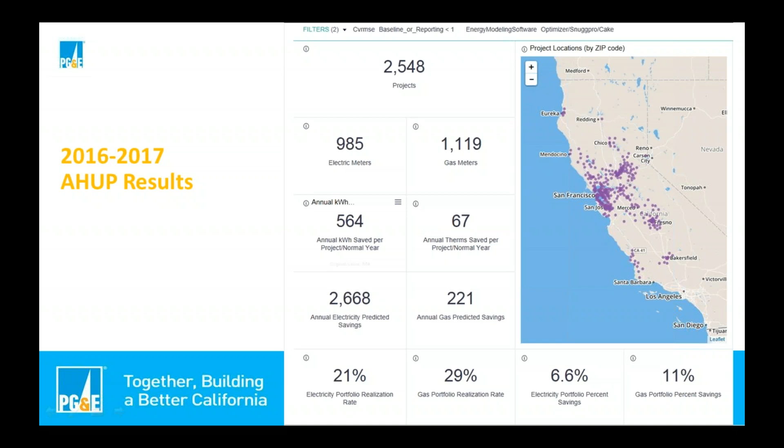So obviously there's a couple of things we have to do. We have to improve the use of the models so that they're not over-predicting. We'd also like to increase the savings in the program. And if we do both of those things well, we can bring these numbers much closer together. Any questions on this quickly before I jump off this slide?

Okay, fairly self-explanatory. So let's move from that to this. Why does this matter? And why is PG&E under so much pressure to balance out this equation, to get high energy savings?

Well, we're held to something in California called cost effectiveness. And there's two tests for cost effectiveness. One is called the TRC, that's a Total Resource Cost test, and the other one is the PAC, or Program Administrator Cost Test. I'm going to talk mostly about the TRC because it's really the one that is primarily used to judge the utility programs. And if we have a TRC greater than 1, then it's safe to say that we can probably keep that program going for a while.

If it's less than 1, everyone's taking a very close look at that program to see if it can be replaced with something else. And the TRC is really just very simply a benefit over cost calculation. So if you can increase the benefits up in the numerator there, you're better off than decreasing your costs down in the denominator.

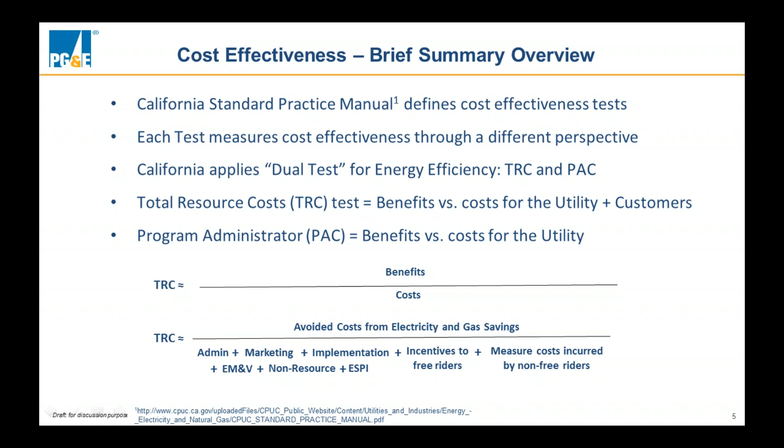And I want to focus on the top part of the equation here and talk about benefits for a moment. So we mentioned the avoided cost for gas. And what's been happening over the last 13, 14 years is that natural gas prices have fallen pretty considerably, and that's because of fracking.

Natural gas has gotten much cheaper to extract from the ground, so we're paying a lot less for it. So when we save natural gas, we're not getting the benefits we used to get, making it more challenging for us to get a TRC above 1.

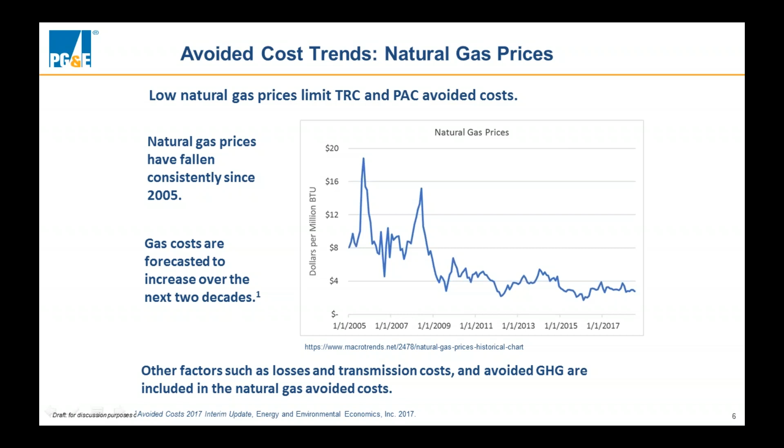Let's look at the electric side of the equation. These are the components of electric avoided cost. There's a whole bunch of things that factor into the cost of electricity at any given hour of the day, across the year.

During the summer months, there's obviously a huge peak load. As temperatures get hotter and air conditioners kick on, everybody comes home from work, turns on their lights, starts the dishwasher, and turns up their AC.

On those really, really hot days of the year, PG&E pays a premium for electricity. We can foresee some of that, and we have to bid against other utilities in the Western grid for some of those resources and have them held and set aside for us, so we pay a premium for that.

If there's a day we didn't predict and the temperature goes way up, we have to pay day-ahead, sometimes hour-ahead market prices, and it's extremely expensive. When you look at costs across the year, they're pretty low during the middle of the day when solar is on, and then at the end of the day, as solar goes offline and we start purchasing power from other sources, it gets very, very expensive.

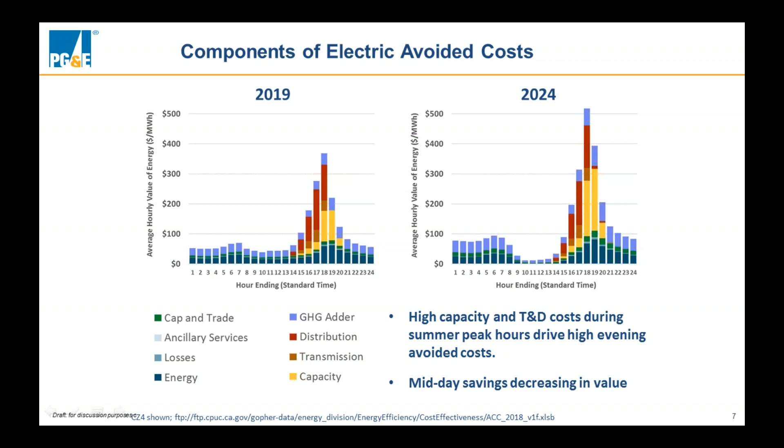So how have we been doing? On the left is the peak demand curve, showing 4 months from 2015. You can see where demand goes high in the afternoon hours.

On the right-hand side are the results from our program, the Advanced Home Upgrade Program. That's not a demand curve, that's a savings curve, showing when you guys are actually getting savings during the day, broken out into the 12 months of the year. You can see that for the shoulder season months there's not a lot of savings, and not a lot for the winter months since we're looking at electricity here. But for some of the summer months, we're getting very good savings during that same afternoon window.

And we can do better than this. We can even improve these load saving curves, and we will. That's what we want to talk about today—some ideas for how we might go about that, and how we can work together to make that happen.

Any questions on that? We have one: the savings shown on the earlier slide—are those home or gross savings, or net?

Yeah, so the slides we've been showing are gross savings. You may have heard these terms, gross savings and net savings. Basically, these savings from our program haven't been compared to what they call market effects, or what's going on out there among all energy users in PG&E's territory. It could be that all energy use is going down a little bit, and that's in fact been the case.

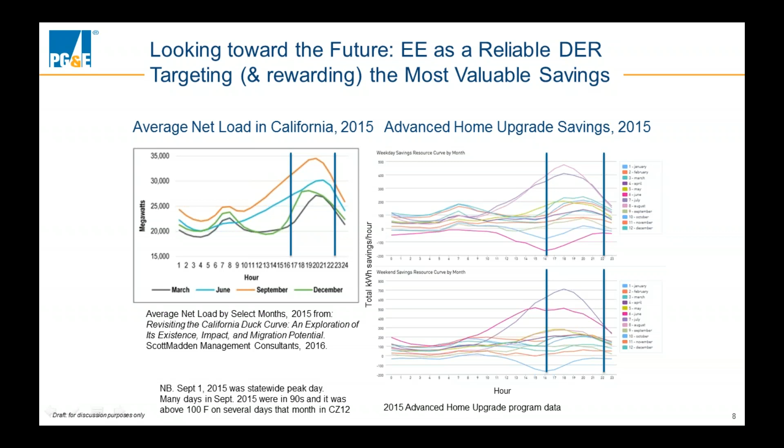Okay, so first of all, the first thing we need to do is reduce the overall customer incentive by 50%, to align more closely with the actual energy savings, those average realization rates. And we plan to do that by January 1st, 2019.

Technically I should be cutting these by 70+%, but I don't want to do that much—but I need to do something radical. I need to be responsive. The CPUC wouldn't consider us to be responsible program administrators if we didn't react in some way to this. So that's what we're proposing, number one.

Number two, we want to increase the software realization rates to 80% electric and 80% gas from the current realization rates of 21% and 29%. And we want to do that by roughly a year from now. We need your help to do that.

Third, we want to increase the average per-home energy savings to 1,200 kWh and 120 therms from what it is currently, 564 and 67. Again, we want to try to do that by November 1st of next year. So we have pretty aggressive goals.

And then finally, very important to us is ensuring the future PG&E program participation for high-performing contractors. So all of you who want to go there with us and grab that ring, become high-performing contractors. Some of you may be there or nearly there right now. But for all of you who want to be there with us, we want to ensure that there's future work through PG&E energy efficiency programs for all of you.

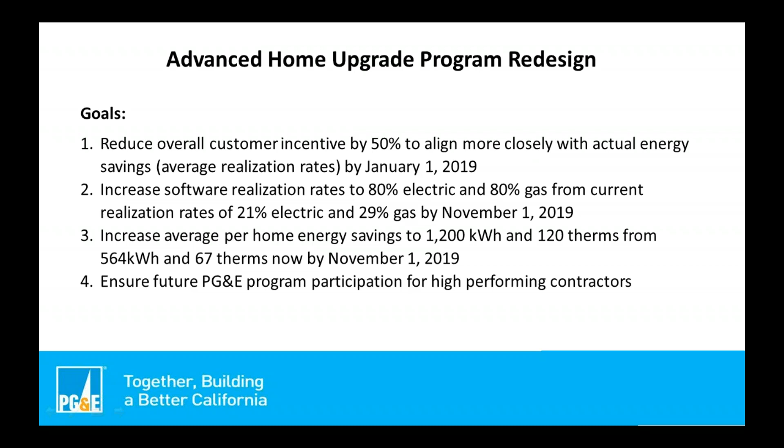All right, so the first goal, to elaborate on it a little bit: reducing the overall customer incentive by 50% to align more closely with actual savings. We achieve this by taking the existing advanced home upgrade structure and simply applying a 0.5 modifier to all the savings that we capture. So there's the tier-based site savings.

Is there a laser pointer on this? Oh, okay. There's a tier-based site savings, and then there's the kilowatt hours and therms. So out of the energy modeling, we get those two outputs, right? The tier-based site savings applies to the overall—it's basically the kilowatt hours and therms converted to BTUs, and it's the whole savings for the site. And then we take and add incentives to the kilowatt hours and therms specifically, separately, and that gives you a total savings for the project.

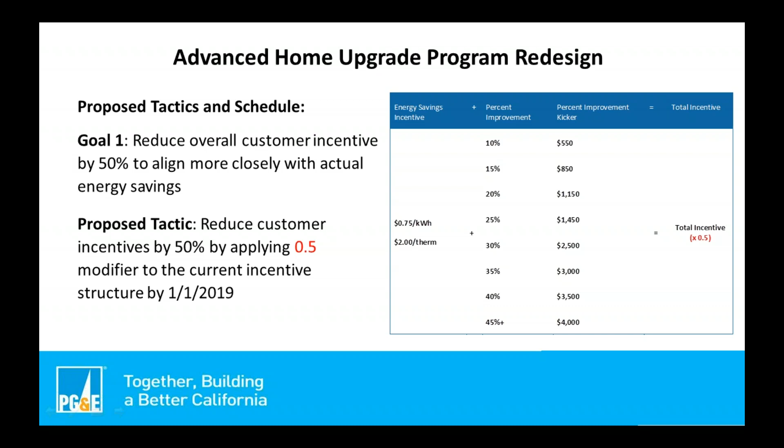So if most of you are familiar with this, all we're proposing is to cut that in half using the 0.5 modifier. It should be pretty simple to see and understand, and it's not so much about communicating it to customers, because what you communicate is a total incentive, which will already have been modified at that point. We're going to do this, targeting the beginning of the year.

Oh yeah, it might. So what happens, it's effective January 1st? Yes. What happens if you've got a job that already has a notice to proceed in December, and it goes in? I'll get to that in a minute, but basically you want to clear through that stuff by the end of November, beginning of December, so you don't have anything still in the approval process by the time we turn the clock over to January 1st.

The software modeling tools stay the same, so just a quick image here - there's the laser pointer - Optimizer and Snuggpro on the right.

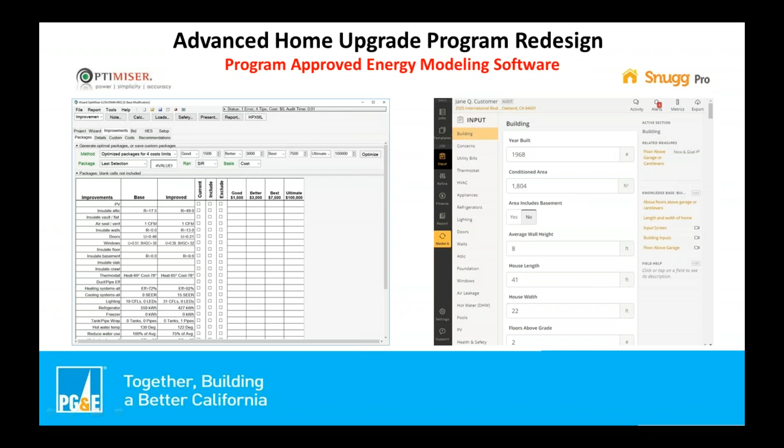Goal number 2 is to increase software realization rates to 80% for electric and for gas from the current 21% and 29% respectively by November 1st of 2019. So we're looking at a whole year to get to this point, but in order to do this, we've identified some tactics to try and get there.

What we want to see is that all the energy models submitted be calibrated. This is a feature that hasn't been utilized fully in the past - some contractors do this already, but very few have taken advantage of it. It's something we see as a tool to get us closer to actual savings versus predicted savings. There are also some assumptions baked into the software modeling tools, and there are different ways to be out of alignment between prediction and actual savings.

One of the primary ways is to make better assumptions about consumption based on a previous year's worth of customer data. So what we need is, when you go out to a project site, to sign up the customer to use PG&E's Share My Data feature, which allows them to share their utility bill data with us. Then we calibrate the models for you guys. What you get back after you submit it is a calibrated model, with maybe some adjustments needed, as some of you are familiar with in the QA desktop review process. What we get is a closer approximation of predicted savings relative to actual savings - that's the goal over time. We're looking to be doing that by November 1st of this year, so all energy models become calibrated by that time.

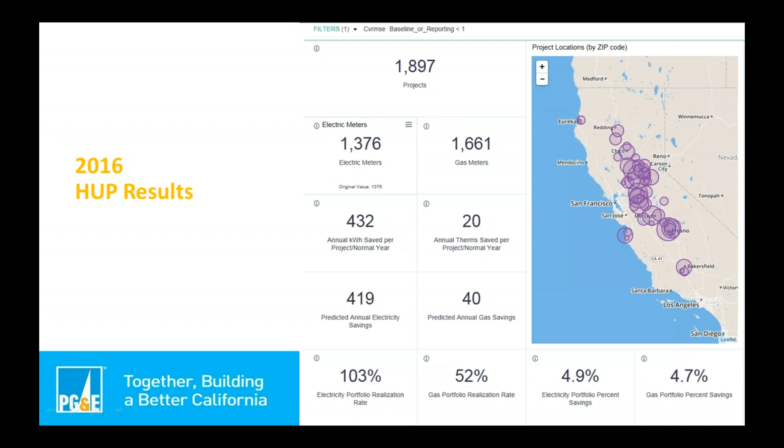These are the results. So this is why we're proposing to not apply a modifier to the electrical side of the savings out of that home upgrade calculator tool, and on the gas side it's right around 50%, so they align pretty closely.

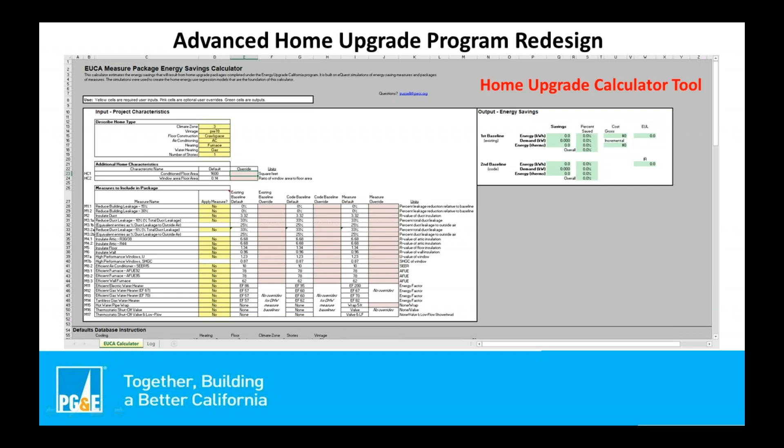It's very similar to the energy modeling software Q&A you may already be familiar with. It spits out kWh and therm savings as well as site savings for the whole project, so it's a very similar end result in terms of the data we can base our incentives on.

Just before Torsten moves on, I want to make clear, if you use that tool, you don't have to get permission from the customer to access their data. That's one step in the process you can avoid. If you continue using the approved software right now, you have to get the customer to provide their login information for their PG&E account, and then they can give permission to share the data with Build It Green. It's an extra step in the process for you.

So the customer doesn't have to share their data? Yes, we have something called guest access now. We made it a lot easier than it used to be. All they need is their account number and the phone number associated with their account, and then they can give permission to Build It Green to get the data. But it's still an extra step - they have to get their account number, remember the right phone number. Maybe not that hard, but something to consider.

Ideally you'd be working with a tablet on site, so you can sign them in using that URL right there and run them through the process on the spot. We'll have documentation that gives you a step-by-step how-to on running through the process, but it's pretty simple. You can go there and do it online, yes.

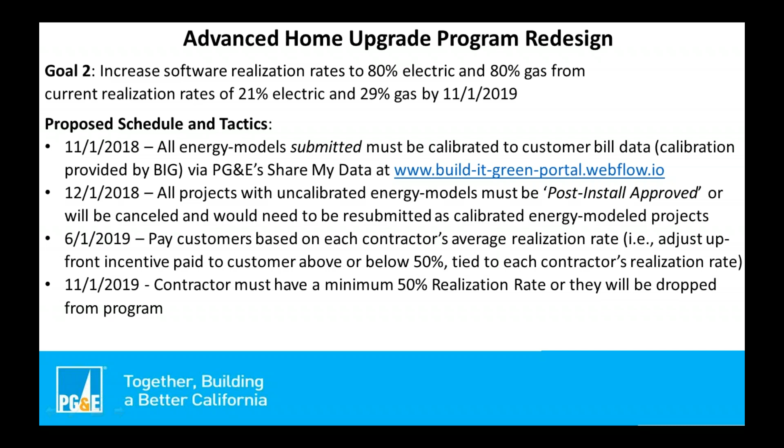For this guest login access, it's supposed to be up and running and working pretty well - you need the account number and their phone number. If you don't have internet service, we do have a paper form too. We'll work on the documentation to make sure it specifically highlights the details you need to follow, because with accounts you can have multiple service addresses, whereas service IDs serve a specific address. So someone could have a bill with an account covering multiple services for different buildings - it has to be specific.

And then as far as goal number 3 goes, we also want to, as you saw on the summary slide earlier on, increase the overall per home energy savings to 1,200 kilowatt hours and 120 therms, up from 564 and 67 respectively, by this November 1st look back date, so the analysis period of approximately a little over a year.

One of the tactics, or the primary tactic to get to that point that we've identified as helping us get there most effectively, is to provide training and a contractor incentive of $1,200 per project to meet the high performance HVAC installation standards.

So what we know is that a lot of the systems that get installed tend to be not performing as well as they could be. And there are a number of reasons for that, a lot of which we'll go through in a little bit more detail here.

But ideally, you've taken advantage of that incentive and on every project, you're doing more basically residential commissioning on your systems. So there's more measurement involved and there's adjustment as you go, and it's a bit of a change in the mindset and approach of your sales folks and your installers. But it yields some really good results, and it's kind of a market transformation that we'd like to see occur, and we think will get us to this higher per home energy savings.

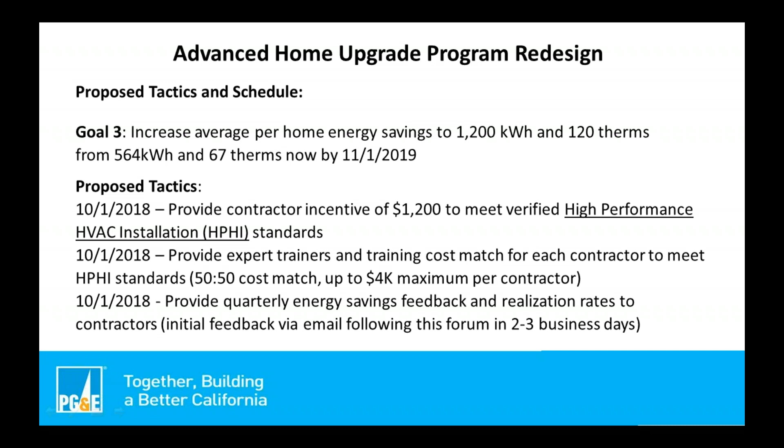We will have some initial feedback for contractors following the forum. Give us a couple of days to do that. So early next week, look for an email on that. That allows you not only to see your realization rate, but also gives you a link to follow up with and provide feedback on, ask questions about it.

Yes. Can you repeat the question for those on the webinar? And can you speak more into the mic? Oh, yeah, so let me move a little closer. The question was specific to a customer who wanted to potentially do a different configuration on their system. So that question I don't think we need to get into here, it's more of an offline thing, but I'll try to repeat them into the microphone here.

So the standards themselves, I'm not going to go through these in deep detail because Dan will be doing a little bit more detail on them shortly.

In effect, for item number 1 you have equipment efficiency requirement to meet, and for item 2 it's more about downsizing the equipment you could install on any given project, and getting for item 3 the airflow up and the watts per CFM down, so making sure you're maximizing the efficiency of the system.

For item 4, getting to at least 3% total duct leakage, but ideally effectively 0% duct leakage. There are ways to do that, not the least of which is making the duct run short, fully extended, and run low, which also allows you to bury them in insulation.

For item 5, that's kind of the roll-up for performance on the AC projects. It's getting to 85% or better of manufacturer performance tables on the delivered sensible EER. There's a spreadsheet contractors will be able to use to take in all those measurements, and it delivers a value for that particular metric.

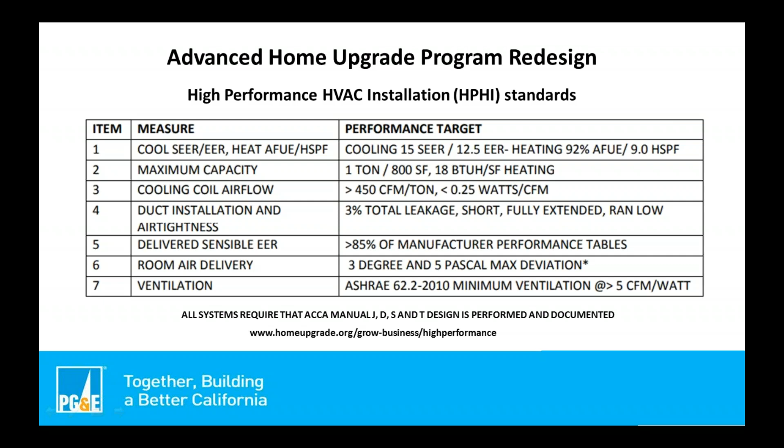And then also ventilation, meeting ASHRAE 62.2 2010 California, and making sure that when you do those fans or centralized system, it's not consuming more electricity than it needs to deliver ventilation.

You all should have picked up a copy of those standards and the data collection sheets when you came in. As far as collecting the incentive goes, training and mentoring is required so that you understand the expectations in greater detail for measurement and for data collection, meeting all 7 of those performance specifications on the previous page. That documentation is available at homeupgrade.org currently.

Performing this measure should be included as a line item on a scope of work, ideally with a specific measure cost set aside for it, although we don't want to get too much in front of your process. So as long as it's called out on the scope of work, that's sufficient. If it's part of a larger package cost, fine, but it'd be great to be able to see that as a line item, including the associated specific costs.

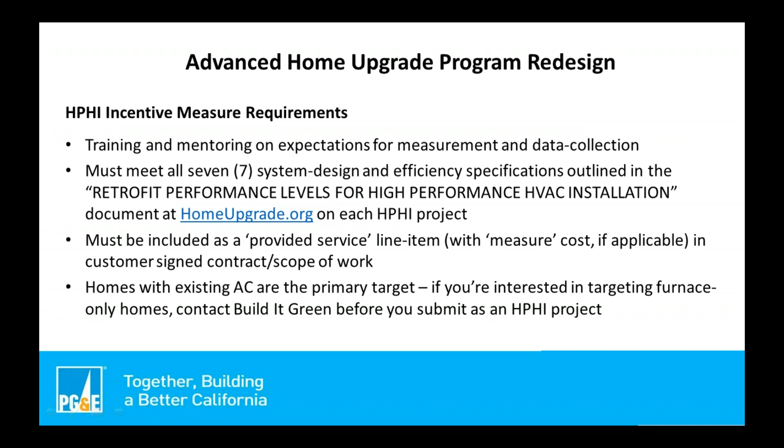That's good data. Homes with an existing AC are the primary target of this, although you can do homes that are heating only, but do contact Build It Green before you submit, so we're clear on all the expectations and which of those metrics you're going to focus on for that kind of project, because obviously the delivered sensible EER is not a metric you can use on those projects.

So to collect that incentive measurement, there are requirements that include for the measure itself. You actually want to have an existing advanced home upgrade project. This will be something you can select within the contractor portal as an additional measure. Once you select that measure, if you are an approved contractor, then you would add additional documentation that includes the spreadsheet with all the measurement on it, any additional pictures, etc.

The 7 specifications are something that will be QA'd along with that advanced home upgrade project by Build It Green's QA review team at 100% rate, the current rate that we do for all the QA on each project. And then 100% FQC by Build It Green on the first 3 high-performance HVAC install projects, to make sure everyone has got it nailed when they're out there in the field and doesn't need additional mentoring to brush up on anything specific. Once you've achieved that, release it back to a 5% FQC rate, provided that all 7 specifications are being routinely met on each project.

Question: Don't you think that incentive's a little low for what really is happening in that requirement? Even if you incentivize guys to go for it, wouldn't it be better? I think the incentive isn't designed—so the question was, isn't it a little low for trying to achieve that kind of work?

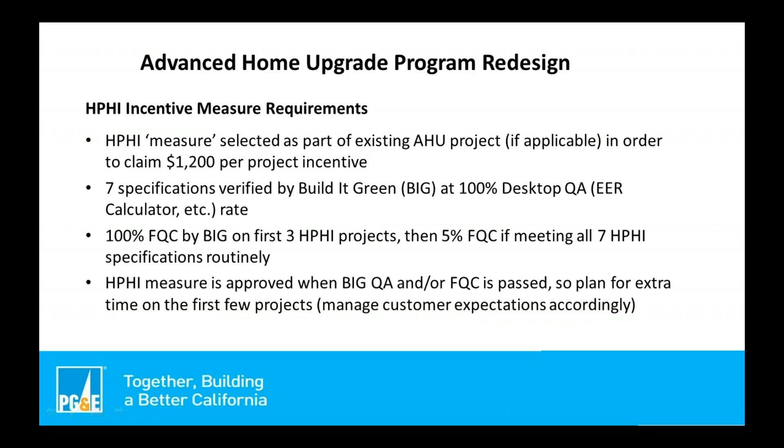As far as the high performance HVAC install measure, it's approved when Build It Green QA and FQC is passed. So on these first 3 projects, plan for a little extra time, and manage customer expectations accordingly.

So as far as the high performance HVAC install training goes, it is a significant time commitment. You're talking about, for the sales staff, a couple days of extra time, administrative staff potentially in the office, especially if they handle a lot of documentation and submitting documentation to Build It Green. And then the installation staff and the crew leads, more like 5 days at least. So it is something to think internally on, and you've got to be committed to it. You want to take the plunge, but we want to go there with you and help you do better work out there and collect an additional incentive in the process.

The training must be completed prior to the rebate application submission. That is because this is more involved than a typical install process. It is residential commissioning. It requires a lot of extra measurement and follow through and adjustment as you go, and it's well worth the experience.

I've been out to a few of these, and we've had some contractors go through this already, and they've actually changed some minds. They approach projects differently now because they've been through the process. And while not every customer is going to be a good candidate for this, they do approach every project, when they go in the door, from the idea that they want to offer this and try to do this every time they go out, and they'll do as much of it as they can. So they're out there doing better work regardless of whether they're meeting all 7 of those specifications.

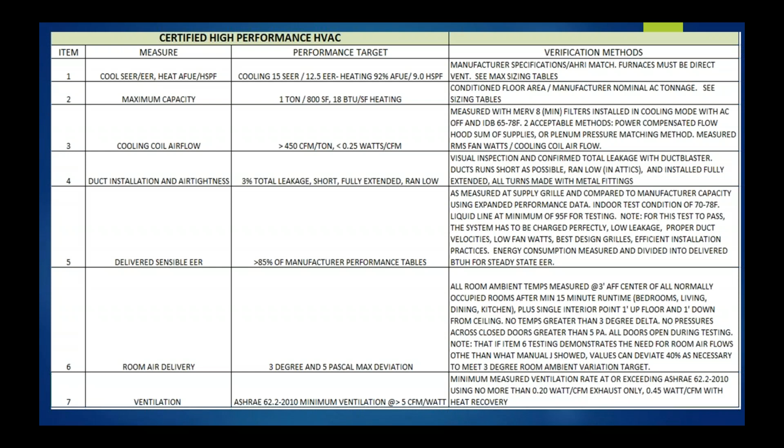There's a document that describes this—let me jump back a bunch of slides so I can point. Okay, so on the right-hand side where it says verification methods, those methods all have to be done following a procedure and with proper equipment.

And that corresponds to this document. It's a multi-page document—it says what the procedures are, it says which pieces of equipment we can use. I suspect we're going to do an update to this soon because one of the pieces of equipment has changed. I know that, and possibly the program people didn't, because I'm not a full-time staff person.

So I'm telling you, we probably have to make a change. There's a newer flow capture device on the market that should qualify for this. There's a device called the Flow Blaster that the Energy Conservatory made, which is great, but they screwed up—the batteries are bad, and so they stopped making it. That was the best piece of equipment when this was written.

So I think we'll broaden the acceptable pieces of equipment for this. But the big flow hood that the HERS raters all use, it won't qualify—it's not accurate enough. And that kind of stuff will be in this document.

So why do I get to be up here? Because we're still back in this place, right? The boulder keeps rolling back down the hill. The HVAC industry is not turning out a product that's getting us what we want. And you guys represent people who are trying and have had successes to varying degrees, right? And so that's good, but overall we still have this problem.

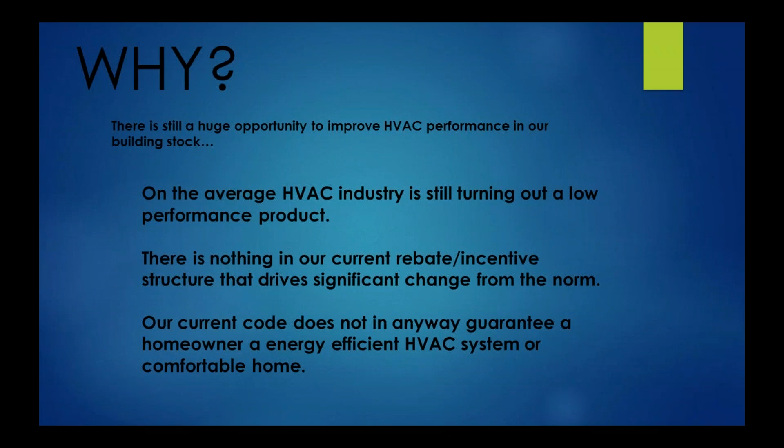Does that feel fair? Anybody feel picked on? Like you guys are kind of like ringers, right? If I had a bigger audience, I'm sure somebody would be annoyed at me at this point. Which is kind of the point.

Because I get to teach these classes, I get to meet all kinds of people. There was this guy in class who said the sizing criteria you keep talking about don't seem right - he'd never heard anything like that before. I said, no, a bunch of us are doing it, it works, we can prove it, I'm 100% certain this is true. Then I said, why don't you go back and look at the data? Because the CEC's got all this data from permits and HERS ratings. Go see what's going on, tell me if what's coming into the office is any good, because they sort of all believe they're busy making code and making rules, and it's pretty good.

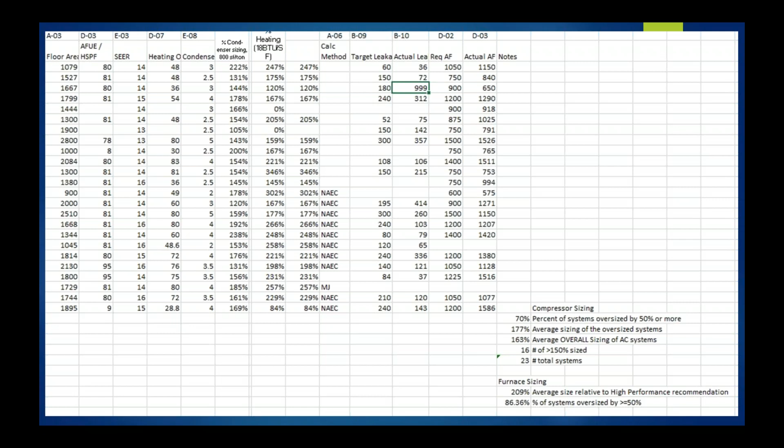So this guy actually did it, and he sent me this data set. It's not very big, but it's super fun and kind of depressing. 70% of the systems in his data set were 50% or more oversized. The average sizing of the oversized systems was 177% of our target. If you pull the AC systems out by themselves, they're 163% oversized. Of the total sample of 23 systems, 16 of the 23 were at least 150% oversized.

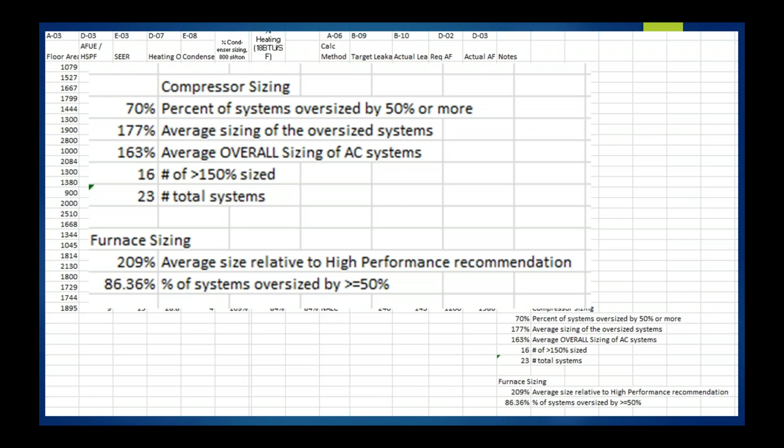So what are we happy about? Why are we proud of ourselves? Maybe you're not doing this and you get to be proud of yourself, but as an industry - yay for us, right? This sucks. At least they got permits, and these are permitted systems. That's part of the argument I've been having with folks at the CEC: the permitting in and of itself is largely meaningless at this point. We're not making the changes we need to make by virtue of requiring permits.

So, soapbox aside, what do we have to do? This is the same stuff we've been talking about for years now. You adopted it a long time ago. You guys have adopted it, which is great. We just need to continue moving in this direction.

Forced air heating and cooling systems can be thought about by 6 basic principles, and you'll see these line up with the program requirements - they were thought of by the same guy. Years and years ago, I asked Rick Chitwood how to figure out how to talk about and evaluate HVAC systems, and he said there's this article I wrote called Performance Factors for HVAC. Here, read it. It listed 6 things, a design target, and a way to test it. I thought, this is great - it's a super simple, extremely effective way to look at what we do.

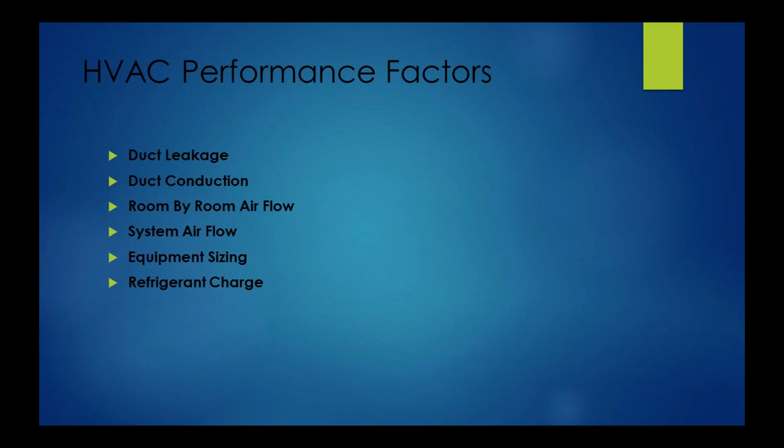So, duct leakage: 3% of nominal flow, right? That's a 50% improvement over code. In this program, you'll actually have to have airflow, whereas in code you can kind of not have the nominal airflow and still get credit somehow.

Is this a hard target, 3%? No, this is way too easy. Contractors that are doing nothing else right are already doing 3% or better. Contractors who just aren't paying attention at all are struggling with this, and it showed up in that data set - a bunch of things didn't qualify, but this is easy. Use mastic, right? Done. Use a lot of mastic, even better. This is not hard. I know a story about mastic.

Okay, I've been coached that I let people talk too much and I'll blow my time slot, so I have to do it fast. In 2013, we did a house in Oakland, built in 1996. Bueller Heating Air had done the system, right on time. I was up there doing the duct leakage test and looking at the furnace. He had a name on it, and it was one of the only ones I'd seen at the time using mastic - everybody else had been using duct tape. We went down to do the duct leakage test and got 2.9%. That was 16 years after the fact, and he still had 2.9%. At the time, Title 24 was 6% on new construction, so I was targeting 6% duct leakage.

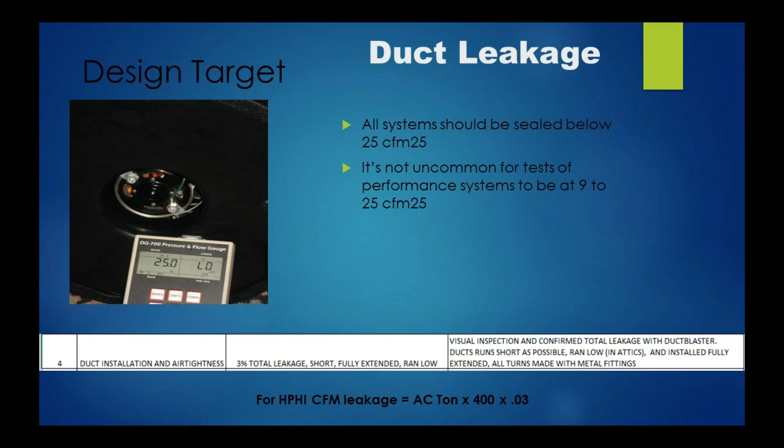My company uses 25. It goes right in our work scopes: duct leakage will not be higher than 25 CFM. All systems should pass code at that number, and it gives me a hard target that is never flexible. If I do a 5-ton system, which I've never done but theoretically could, I would still do 25 CFM of leakage. If I do a 1-ton system, I could too. So a hard target is the way to do this.

Okay, so that next piece about ducts run as short as possible and low in attics is just about thermal losses. Thermal losses are huge in our climate because we do about the dumbest thing you could possibly do: we put HVAC systems on roofs and in attics. And I'm not saying we're dumb, it's just kind of hard not to at this point because that's how all these buildings were built. We have millions of these.

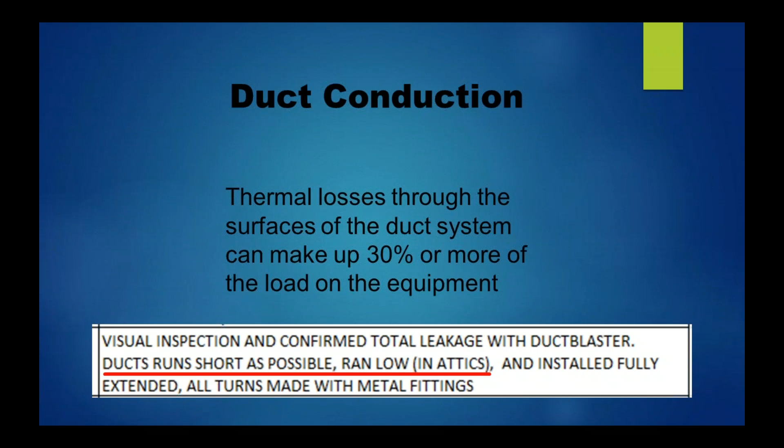So it's our job to improve them to the ultimate level we can get away with, because this is the worst way you could do this. You can't find more harsh conditions to put a duct system in than the attic of the building. So we have to be really careful about how we do it.

So this is a mathematical calculation assuming a 2,000 square foot house, assuming 40% surface area of the duct system, which is the average relationship between ducts and floor area. If you do the calculation for attic temperatures and R6 ducts, we're looking at 0.89 tons of loss capacity. In this climate, you would do R8 ducts by code now. There's still, I think, maybe some coastal climates where you can get away with R6.

Never use R6, it's crazy. Find a way to get the customer to pay for R8 and then bury that, because a third of the capacity of a 3-ton system can be lost just to hot ducts. Why would you give that away? Or, if you thought about it like this: if you fix this piece, you can reduce the size of the equipment by 30%, which makes it easier to comply with the program, and it's better for your homeowner. They get better air quality, and they get lower bills and increased comfort.

Why'd I say better air quality? Ducts are sealed, but it's directly related to equipment size.

Runtime, runtime. California has some of the worst air quality in the nation for particulate matter - farming and traffic and fires and everything else. How do you get particulate out of the air? With a filter. You can run the system so it filters the air all the time, and then have a massive air conditioner kick on and off once in a while to offset the load you're creating by doing that. Or you can run a tiny little conditioning system with a big filter at high airflow and get free filtration. It's up to you.

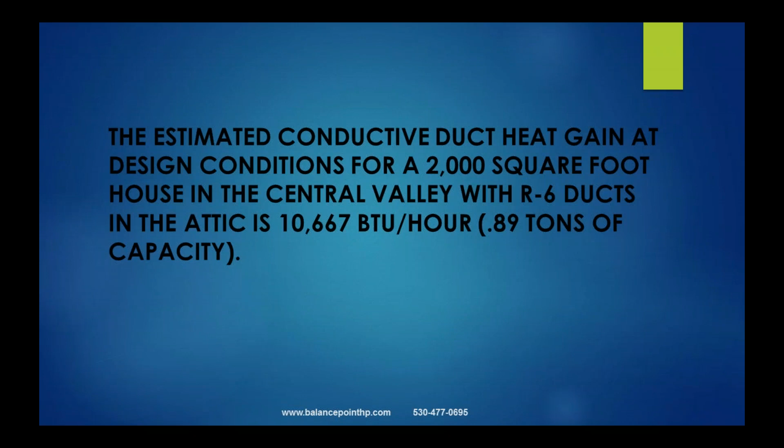We should be selling air quality. And if you sell air quality right now, people will buy it. Has anybody gone outside this summer or last summer? It's not a hard sell. Small equipment will do a better job for you.

I didn't do that, I don't think. Hold on, there we go.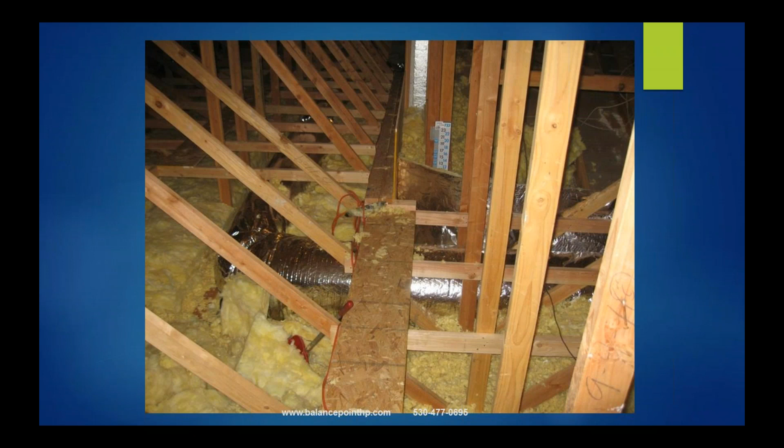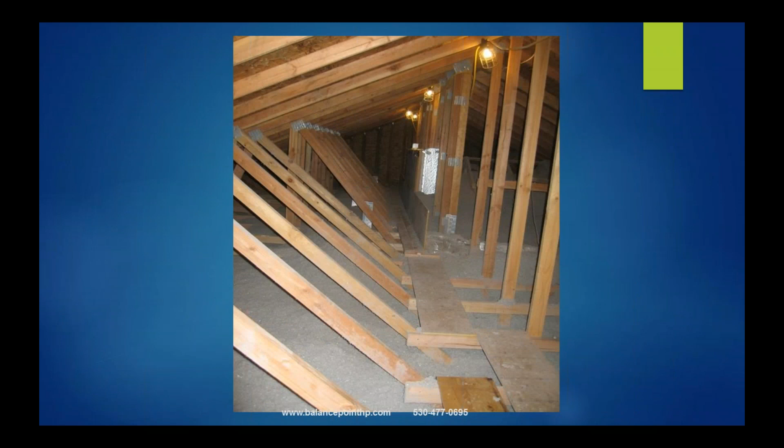Okay, so run low in the attic and short as possible. In this instance, sadly, that was short as possible - there's a layout that I couldn't change, and so this big elbow in this duct was unavoidable. We frequently reposition stuff, like abandon one ceiling supply and use a different location to shorten ducts. And this is the same photo. Run low, pull tight, bury it.

Crawl space systems. You know there's a furnace in this photo. Did you know that some furnaces can be wrapped in insulation? If you think about it, if you're going to take the hottest thing in the system and put it outside the building enclosure where we'll have the greatest losses, wouldn't it make sense to insulate it?

So what's the deciding factor whether or not you can wrap a furnace in insulation? In theory, you could just wrap a furnace and be in trouble. How do you know? Has anybody ever seen the thing on the label that says clearance to combustibles? If it's 0-inch clearance to combustibles on all 4 sides, you could wrap it in something flammable, in theory. Fiberglass and foil-faced paper should be fine. And so we frequently do this.

Service access is interesting. I have an uncle who's an HVAC tech on the East Coast, and I was showing him pictures of our work. He was like, I wouldn't do that, I wouldn't do that. It was all about how, he's 70 now and worked into his 60s, and somewhere along the line he wasn't bending over for anybody. So the access became where a 60-year-old guy with a sore back could go without a lot of trouble, which makes some sense, but it's not a great way for us to design houses.

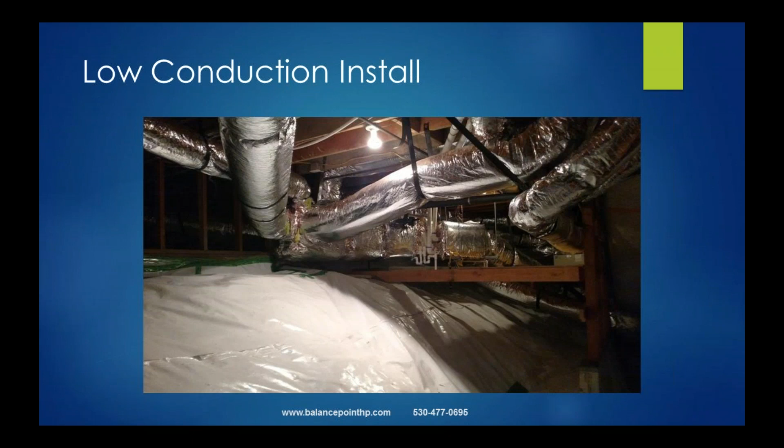This system in the picture actually has an unsealed insulated flap that can just be lifted over to the top of the furnace. The door is taped closed though, so that part kind of sucks. You got to cut the tape to get the door off.

We need a zipper. I've done attic access. Someone said there's actually a zipper solution that works on attic, a zip lock. Oh, zip wall, using a zip wall for attic hatch.

I had a question in the back. Yeah, where was the filter located in that system? In this system, the filter is located at the return grill, which is my preference for filtration because it's easy for homeowners to take on the service themselves.

So let me add an addendum to my service tirade. If the homeowner is not going to change the filter or is not able to change the filter, then they need service. That does need to be done. If you use 4-inch pleated filters, it might be once a year instead of every 3 months.

Don't you want those filters as close to the furnace or the air handler as possible? Because if you have a long return duct with potential leaks—no, I don't. This is a super simple process in my head: I don't have leaks because I don't allow them to happen, and frequently buried. I have to go do a service call soon because somebody's dog peed in their duct. Occurrences like a rat or a cat or a dog change this model—that's a service call, but it's not normal. The normal practice is if it's not leaking, it continues to not leak.

And so well built, well sealed, and you don't have the problem. In that instance, I want the filter at the beginning so that the whole duct is protected, and it's more accessible to the homeowner to change, which makes it easier on the equipment. It's changed frequently.

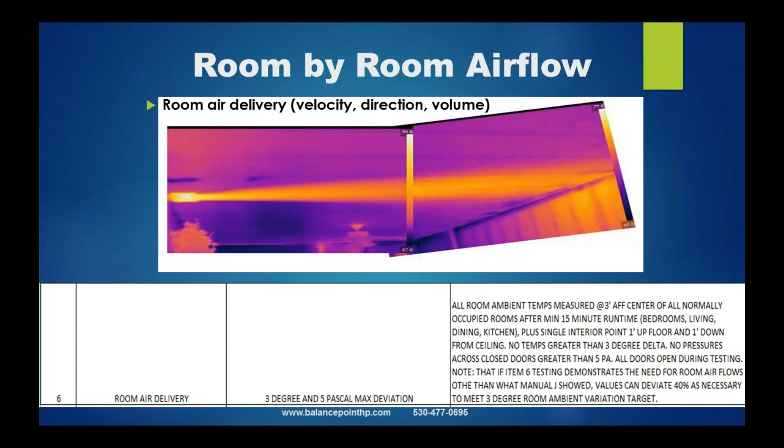You're not required to do this. Life is so much easier when you do radial design because you put a grill in every location closest to the air handler that needs one. So little tiny rooms, we skip them because they don't need to be conditioned. And then you put a damper in each of those ducts, and you can be in control of the airflow without it being a really horrible task. If you have to balance the airflow by climbing all the way across the building and all the way back to try to adjust dampers, it's difficult. If you skip the dampers, you're just guessing.

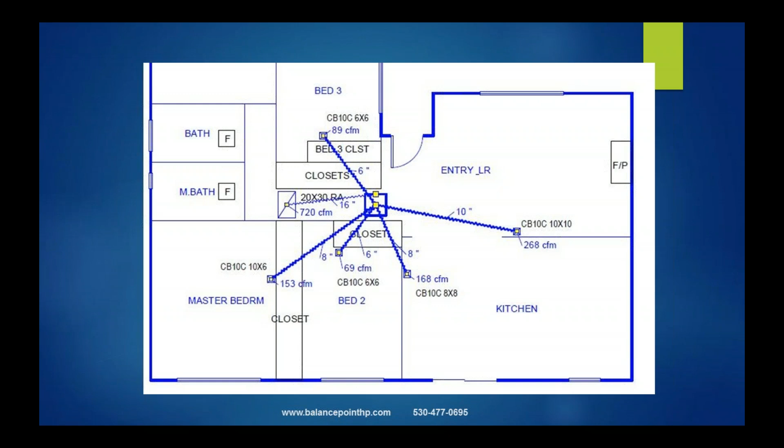So this is an engineering chart. I don't know exactly how manual J does the manual T process, but this is the gist of it. What this is showing you is grill sizes on the left, velocities on the top, and then in the rows and columns is a case for each grill. So if you pick like an 8x8 grill and 500 feet per minute, it would tell you how many CFM you need to make that happen, and then it would also tell you how far into the room the air is projecting as the air slows down.

And so the trick is to get your design airflow through a grill at 500 to 700 feet per minute and have that air hit 25 feet per minute before it hits a person and get 80% of the way across the room. It sounds complicated, and it is a little, I suppose, but you can get used to this. I've been doing this for years, and I've had a couple of times when I had to go back and change airflow because I was blowing on someone, but mostly this works without a lot of trouble. And it's very effective in terms of mixing the home and controlling temperature.

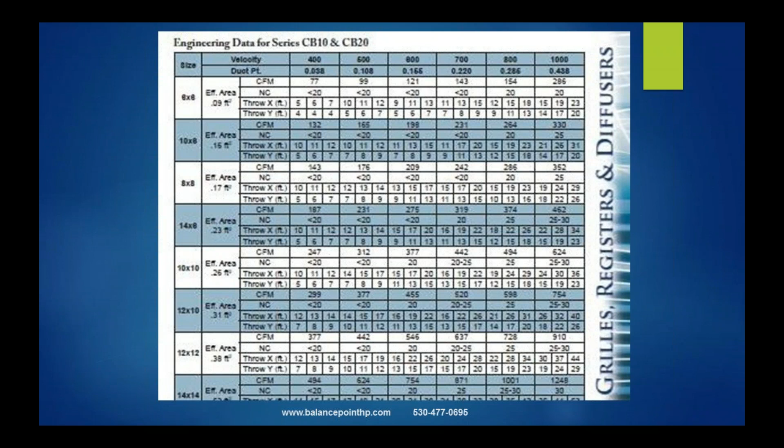So just so we're clear, you can't use that flow hood. I just didn't have a better picture. I should probably. But we're going to measure supply air with a flow hood. And for our delivered capacity calculations, you're allowed to use the sum total of the supply measurements if you use an accurate flow hood, described in the measurement document. This flow hood isn't accurate enough for the total delivered capacity calculation.

It works okay for balancing. I used it for years and then found a better tool and stopped. But the process is the same. In this picture, we're going around to each grill, measuring the airflow and adjusting it to match our targets.

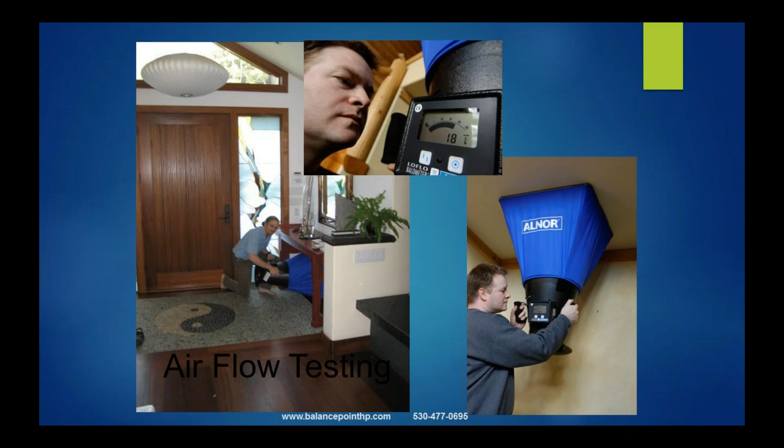Is he barefoot? Gavin is barefoot in that picture. Someone asked if the gentleman on the left is barefoot, and he frequently is. I may or may not have photos of him barefoot on a roof. It's good that we're a little company and OSHA doesn't visit us frequently.

Okay, cooling coil airflow. So 450 CFM per ton is our target for this program. Why? Does anybody not know why yet? Does anybody know why? Why do we do high airflow? The boulder just rolled all the way down the hill.

Yeah, so we live in what is effectively a desert, right? When's the last time it was 80 degrees and 80% humidity here, for more than about 90 seconds? Right? There are weird humidity events, especially on the coast. But generally speaking, if it's hot out here, it's like 15% humidity, maybe 20. If it's cold out, it gets more humid, and it even rains.

Turns out that the actual weight of water per pound of dry air in California is roughly the same in the summertime and in the wintertime. If you get it cold enough, the air gets dense enough, the water comes out of the air. If you warm it up, the container of air gets really large because it gets to be low density, and it feels really dry, right?

And so how much dehumidification does it sound like we need to do with an air conditioner? Literally none, right? We should not manage moisture with air conditioners. They use too much energy for that. You can do a continually operating bath fan with an ECM motor for 8 watts and manage moisture in a house, right, in this climate. If we were in Louisiana, we'd be having a different conversation, but we're not.

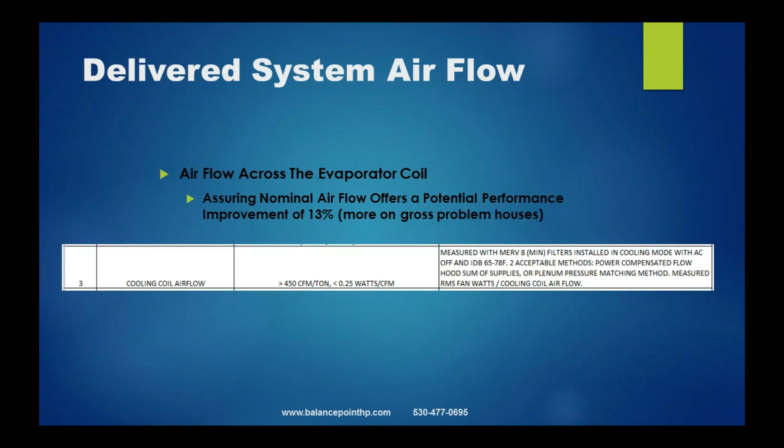But we need for this program to get to 450 CFM per ton and 0.25 watts per CFM, which is—my brain has trouble with the math that way—250 watts per 1,000 CFM, right? So pretty low fan energy consumption. And we get there by doing things like sizing our ducts properly and stretching them.

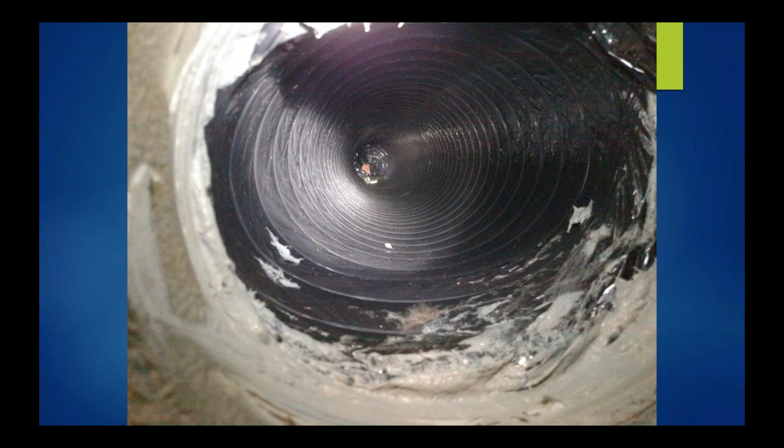Oh, yeah, and remember before when I said I didn't know why we have low airflow? Turns out that one of the things we found in a research study 3 or 4 years ago was that of the 80 new homes they went out and sampled, they pretty much all had undersized returns, every single one of them. And then they went out and just upsized the returns, corrected the airflow, and corrected the charge, and they got 10 to 15%, probably more like 10%, more delivered capacity at each of those case houses than they had gotten as built by code, just by correcting the return, which raised the airflow, and then correcting the charge to match. 10% boost.

We have a program here that's struggling to justify itself, and we're still building stuff where we get a gimme just by fixing the return, right? Like, we should stop.

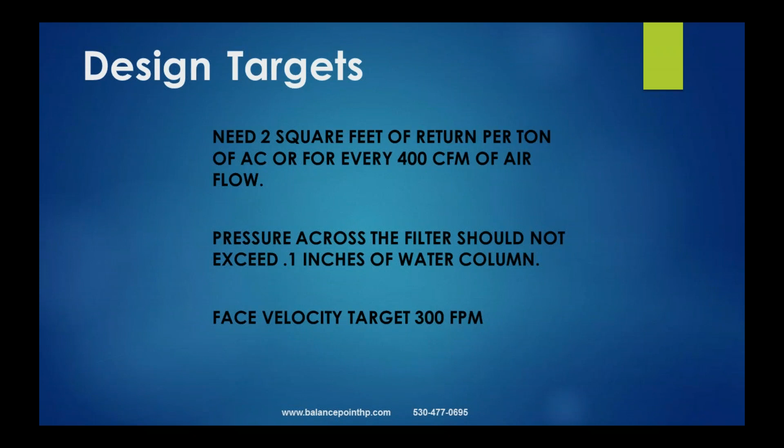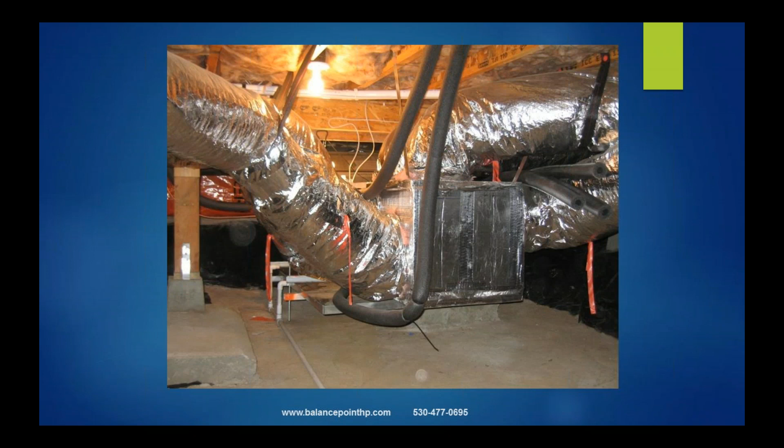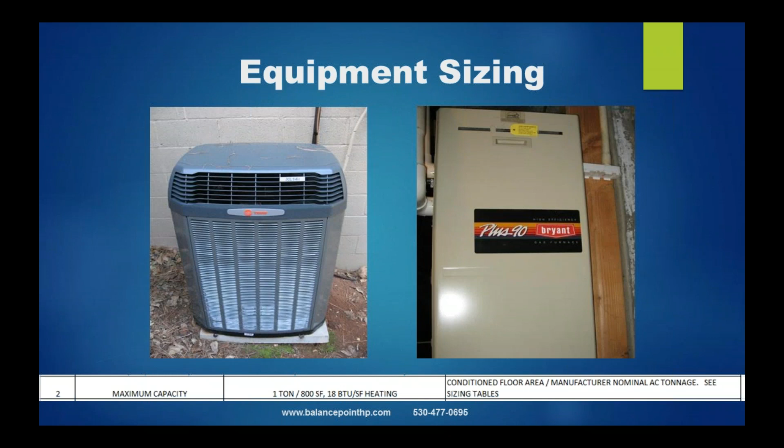And those are conservative, those aren't hard. We can do this on just typical buildings - they don't have to be incredible buildings to pull this off.

And then it's big - this is where it gets a little weird, right? I keep saying smaller, smaller, smaller, but it turns out big fans turning slowly are way more efficient than small fans turning quickly. So ideally, if you're not using a furnace, you'd use something like a 3-ton air handler with a 1.5 ton condensing unit, or a 2-ton condensing unit. The fan is designed to move a lot more air than the condensing unit requires, which means you can set it on a lower tap setting. The RPM of the fan slows down, and the efficiency of the fan blades is increased. You get more air moved per unit of energy with a big fan turning slowly.

And the AHRI matching process is so strict that you can't go crazy - you can't do a massive air handler with a tiny little air conditioner. We can usually do a 0.5 ton or 1 ton mismatch, and we should in our climate. So this is a 2-ton air handler, or a 2.5 ton air handler I think, and a 2-ton outside unit - so it's only maybe a 0.5 ton mismatch.

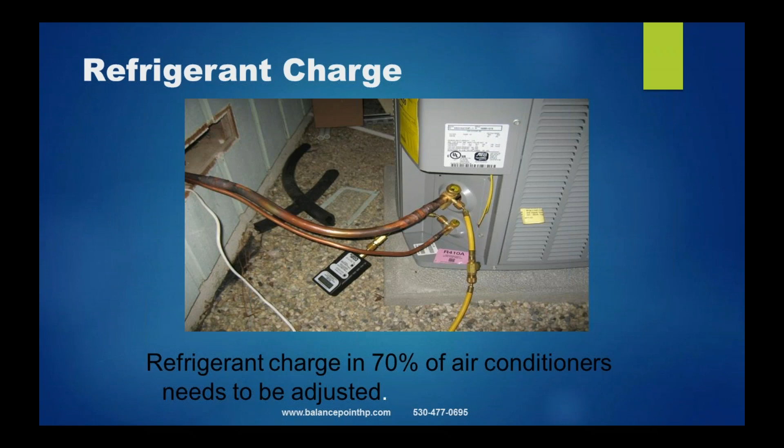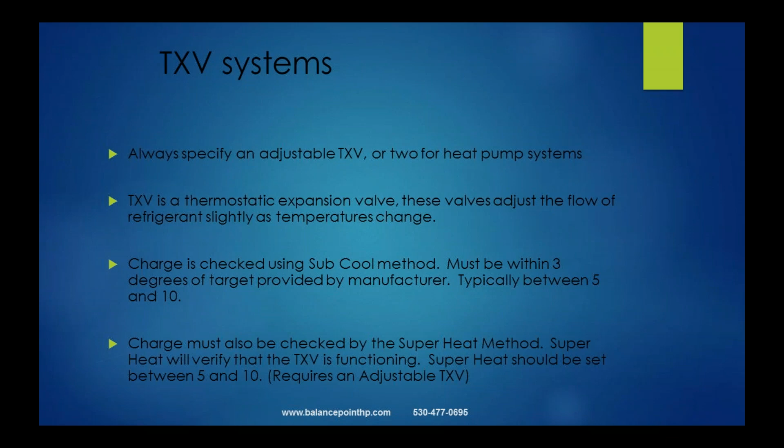I think I probably just said everything that's on this slide. Obviously we're doing higher efficiency equipment, so it's going to have a TXV. Subcool is required by code, and we want that to be as low as the manufacturer will allow. Subcool is basically a measure of back pressure against your compressor, so the higher it gets, the more pressure against the compressor and your watt draw goes up. So subcool on the low side of your targets, superheat on the low side of the manufacturer's target, and you get more capacity.

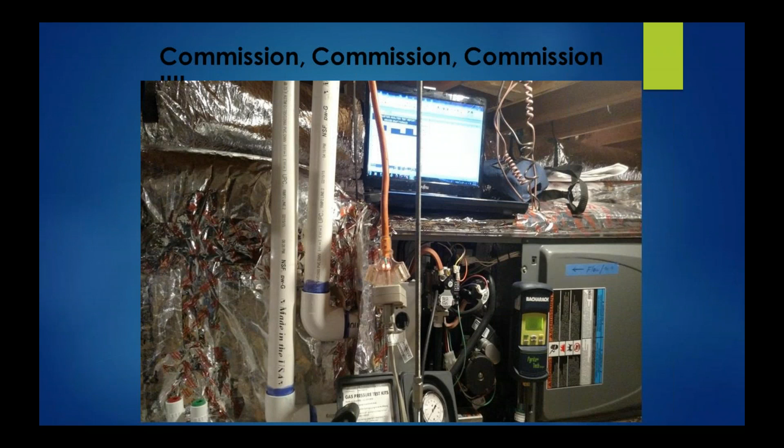And we should commission furnaces too. Does anybody actually measure O2, CO2, temperature, gas pressure, all of that stuff? National Comfort Institute is not a great organization for coaching on energy efficient buildings, but they are great when it comes to understanding the combustion process. They have a really good class about that - I think it's possibly the best class available for figuring out how to commission a furnace. So I would look at it.

So this is that last thing I said earlier in the review of code buildings. We were at something like 55% of delivery. If it's supposed to be 4 tons of capacity at design conditions, we're getting like 2.25 tons or something - a little more than half of the capacity to the house. The reasons are high duct conduction, high duct leakage, and low airflow. It's embedded in what we're trying to change, why this is happening. The people who are really good at this at design conditions have had systems over 90% delivered capacity, and we're not asking for that.

85% is what we're asking for. And I think with furnaces, it might have to be 85% of whatever the output is, because if you commission the furnace, there's not much you can do about the 4% that gets lost in the combustion process. So for furnaces we're going to have to figure something out. But for heat pumps and air conditioners, 85% delivered capacity is the target.

And if your equipment is big, is this harder or easier? You should be noticing a theme - it's harder. Why? Think about the temperature of the air in the duct. If you're using a large heater or a small heater, is the temperature of the air in the duct likely to be different? Small heaters should run not quite as hot as a big heater. If you do the math for figuring out temperature loss through a material, the variables are the insulation value or heat transfer value - U value or R value - the size of the surface, and the temperature across the surface.

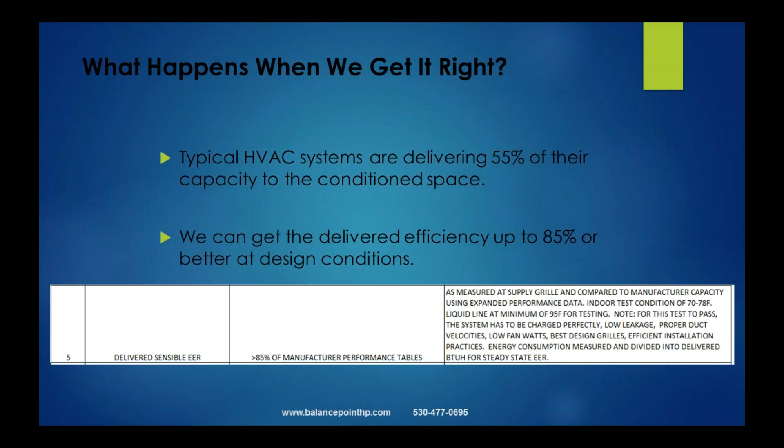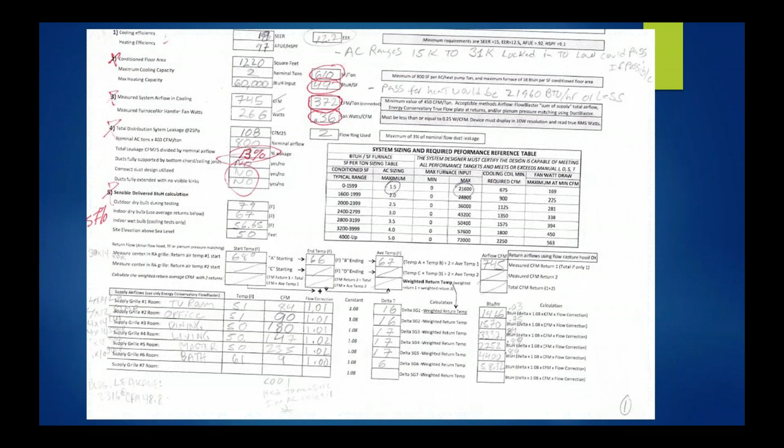None of these concepts are new concepts, right? The information about how to meet these criteria all exists already.

I think it requires some kind of change all the way through a company. The reason I say that is when I do these classes, I get, well, we can't do load calcs, it'll cost too much money. Okay, code says you have to do a load calc, by the way. So not doing one is actually breaking the code rules. I want to say breaking the law, but people get upset about that. So the rules say you have to do a load calc. They actually don't say you have to follow it. They clearly say you don't, but they do say you have to do it. So we're just saying do a useful load calc that's already required by the rules.

And the other one is, well, I'm never going to get my salesman to sell equipment this small. And then I always go back to, don't they work for you? I get that the employee-employer relationship is complicated, but at some point you could figure out these guys need to get paid, or girls, and they should be selling something that you want them to sell. There's got to be a way to get from here to there. And I'm not saying it's simple, easy, and that there's no stress involved.

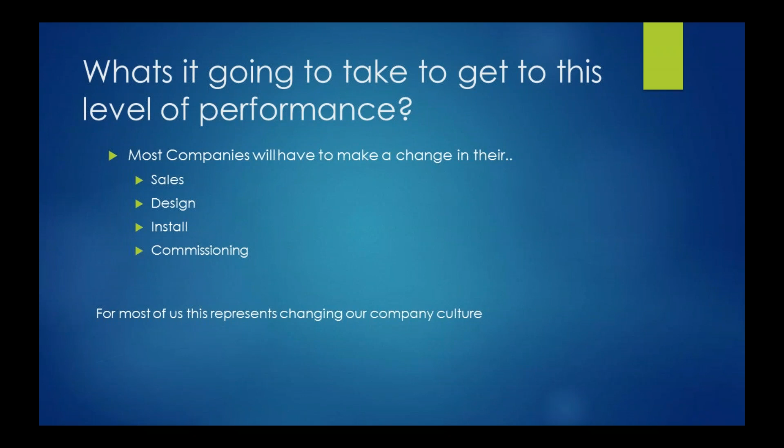But we can't just kind of hang up our hats. And then it changes design, and it changes install, and it changes our commissioning practices. We're talking about really changing the culture of a company. I've only ever done two rebate jobs in the history of my company, and I have no idea what my realization rate is. It might suck, I don't know.

I got one customer, $7,000. I got another one, $5,000. They were happy, I did the job that I thought was a good job. But I meet all these criteria on all of my jobs, which means that there are some jobs that I don't take, and I'm a small contractor, so I have the luxury of not taking some jobs.

And I realize that for some people, you're going to take jobs that you can't access all of these metrics for. But it becomes a question of, when is it okay to sell a job that has really bad airflow? Because the customer doesn't... at some point I'm willing to say no way sooner than a lot of companies will say no. And that's in part because of my company. I'm not trying to be judgy about that, but there should be some point where you say no.

So some of these metrics should just be normal, right? And that's kind of what some of you said in the beginning. We've adopted some of these practices and other ones we're working on.

So we have some money for training. You've got, like, if one of us came out to your site, you have the equivalent of about 5 days of time. And that's not a lot in a way, right?

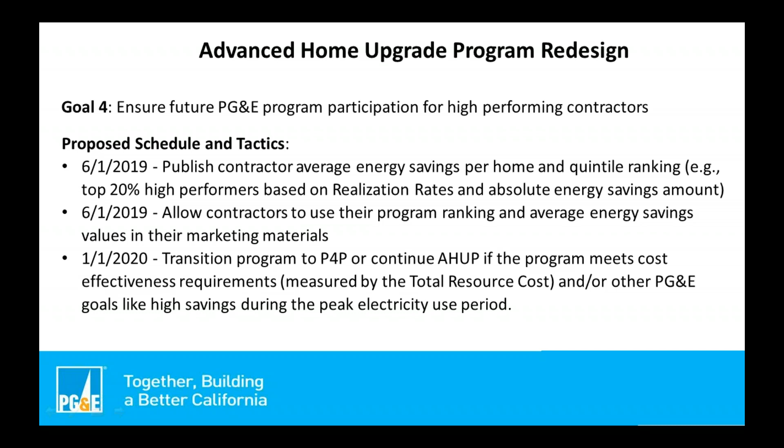So, to not leave that hanging, I wanted to touch on what pay for performance is in a couple of slides. As I mentioned, we put out an RFP, a request for proposals. We've done that twice in the last two years. What happens is an aggregator, also called an implementer, steps forward and says, yeah, we'd like to run this program for you.

And I asked for a bid price from all of them, very competitive. I considered a lot of factors in who we picked: who had a lot of experience out there with residential programs, who had a really good idea for how they were going to get customers and get savings, and also what the price was. Those were the main factors we considered. And then we picked four.

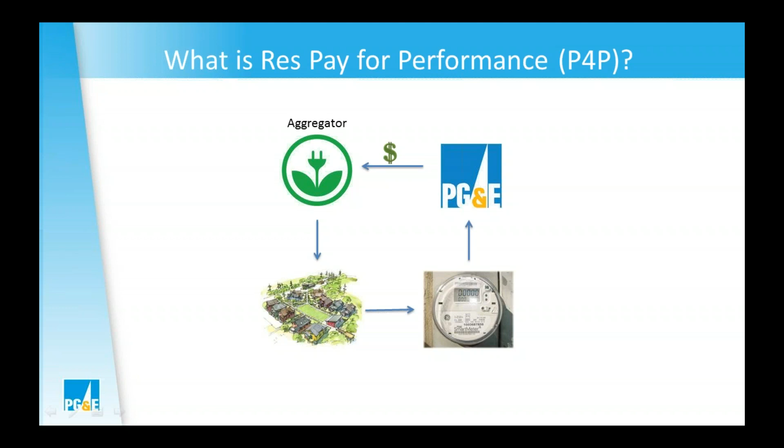They will work with our customers, and we will measure and meter their savings, and we will pay them for the savings, based on an agreed upon price. The one thing that was unique to this program that we hadn't done in other programs is we gave them complete flexibility to decide what products and services they wanted to offer customers. We didn't dictate anything about what the program design had to be. And so we got some very interesting proposals, which I'll go through in just a minute.

But these can be traditional retrofit stuff, putting in new measures, things we're used to seeing. It can be operational things, so things that are on a schedule or timer that can be controlled and optimized. And then behavioral stuff, incentives. One of the aggregators has a points and rewards program, and they reward customers if they get energy savings, and they can use those rewards for more efficient products, or they may consider other things. But at any rate, all of those are in play.

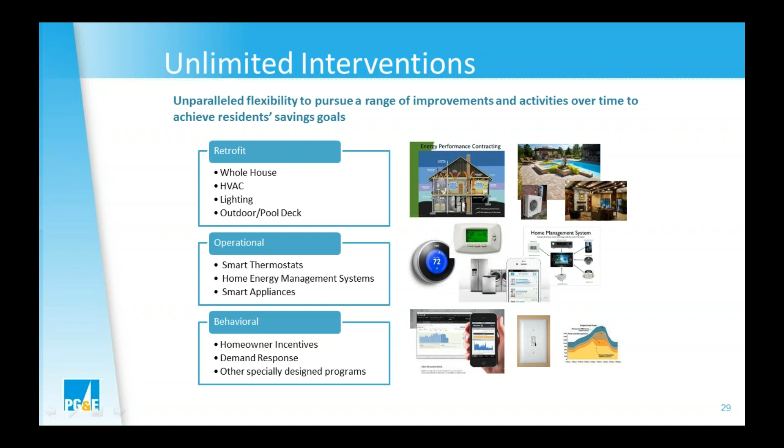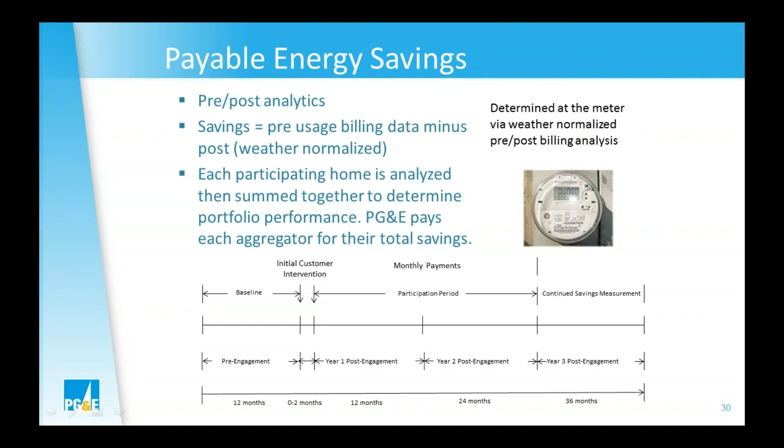I don't need to spend a lot of time on this slide, but the way we calculate their savings is a very simple weather normalized pre-post. So it's the same way we calculated the savings in the advanced home upgrade program you guys were just looking at. We don't apply any control group to figure out net savings. It's all based on gross savings, because we heard back from the implementers: if you subject us to some unknown control group later, we're not going to play. We need certainty up front about how we're going to get paid. So we're going to pay based on the simple weather normalized pre-post.

And then, just to contextualize this a little more, this is where we are today, these existing conditions, and this is the future state we're driving toward. I want to spend just a couple seconds on this: we have some driving legislation in California. We have the SB 350 goals, and the governor just signed even higher goals for reducing energy use in buildings. AB 802 was legislation that allowed us to pay based on metered savings.

And then we also have what are called DER, Distributed Energy Resource RFOs, Requests for Offers. We just had one here in Oakland for Dynegy, the power plant here that PG&E is closing. We need to replace that load, and we decided we'd try to replace it with energy efficiency. So we put out a request for offers, saying, hey, who's out there that can deliver energy efficiency to replace the load from this plant we're taking offline? We got some proposals and we're still reviewing those, but PG&E is likely to do more of this in the future.

In fact, we're closing Diablo nuclear power plant. How many people knew that? A few. So that's 22% of our electric load provided by a nuclear power plant. We're going to need to replace that load, and so we'll be looking at doing that through energy efficiency and through some other renewable resources. But you're going to see RFPs coming out with large dollar figures assigned to them for energy efficiency as a distributed energy resource.

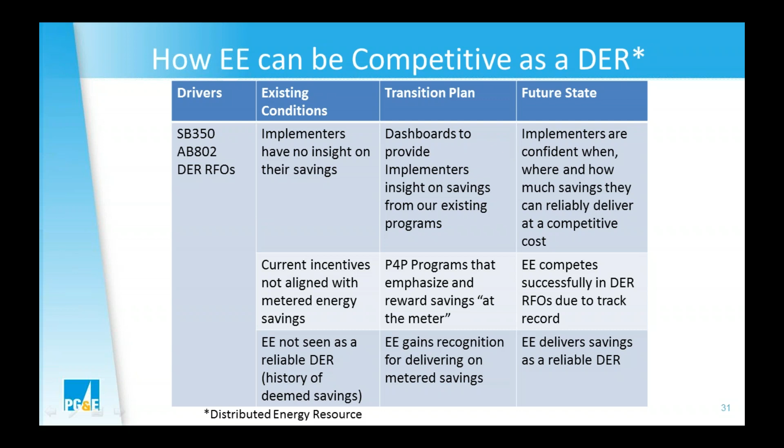So we will arrive eventually at this future state where we are delivering savings as a reliable distributed energy resource. So is that helpful as an overall context?

Question: can you tell us who would name an aggregator for what type of organization? I will, right now. So your first one is right here in the room, Build It Green. Build It Green submitted a proposal under our first RFP, and they were awarded a contract.

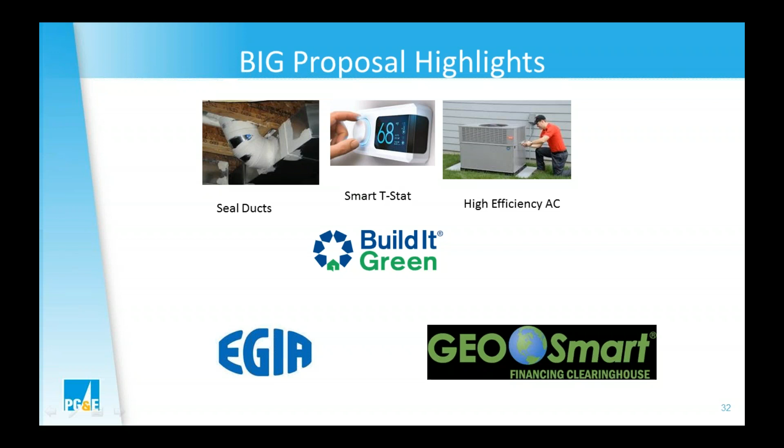They're just getting started this month out in the field. They have a few contractors they've already selected to work with, and they're just kind of getting things worked out with that initial set of contractors. And then my guess is that they'll probably start to look for more as they expand.

This is another one of our implementers, called Home Energy Analytics. They're very new to the PG&E world, although they've been doing this for local governments for the past 5 years. They're not focusing on the home - they're focusing on the stuff in the home. So they want to reduce base load, all of the plug load and appliances in the house, other than HVAC and the shell.

And they tend to be working right now with people who have larger homes. There are a lot of wealthy people out there who, quite frankly, have no idea what's going on in their home energy-wise, and they're uncovering some really - we would think of as kind of obvious areas, but people aren't familiar with them.

So they're finding pool pumps that are running 24/7. They're finding baseboard heaters in a downstairs bathroom that a guest used 2 years ago and left on, and they didn't know it was on. They're finding patio doors open on a downstairs room all summer long with the AC going, and so on and so forth. So there's a lot of energy out there to harvest, and they're out there to try to harvest that.